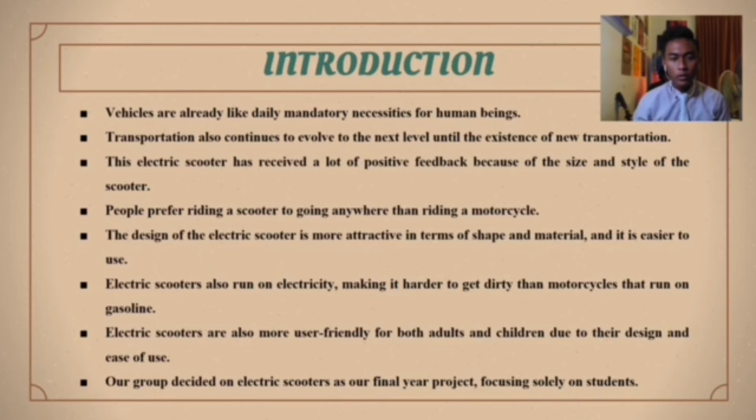Furthermore, people prefer riding a scooter to going anywhere rather than riding a motorcycle, because the design of the electric scooter is more attractive in terms of shape and material, and it is easier to use. Also, electric scooters run on electricity, making them harder to get dirty than motorcycles that run on gasoline. Electric scooters are also more user-friendly for both adults and children. Our group decided on the electric scooter as our final year project, focusing solely on students.

Next, we will look at the background of the project. The title of our final year project is Electric Scooter.

In 1740, Benjamin Franklin and Andrew Gordon developed the first electric motor, and invented the practical battery that could offer a consistent source of power for electric motors in 1799. In 1911, gas-fueled scooters were marketed, and many businesses began producing gas-powered scooters. In 1996, the first mass-produced electric scooter by Peugeot was heavy and not very eco-friendly due to its nickel-cadmium batteries. From 2009 until today, more efficient lithium-ion batteries create quick home rechargeable scooters, offering portability, ease of usage, minimal environmental footprint, inexpensive maintenance, and fewer laws.

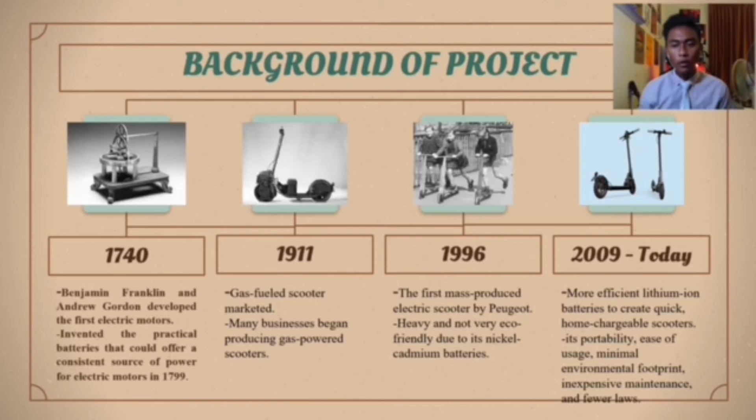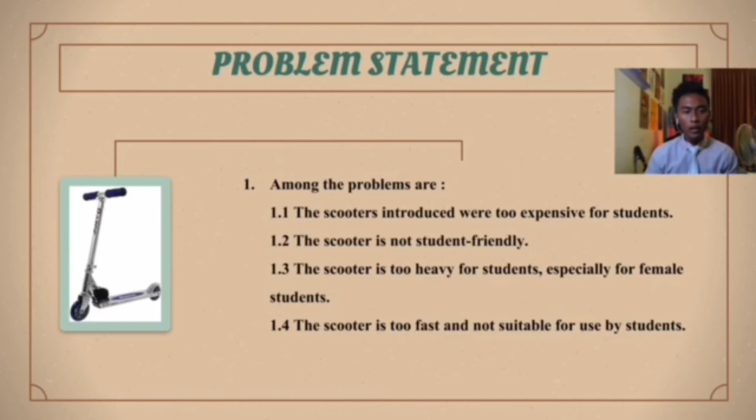Next, we will look at the problem statement. From our findings, there are many problems with electric scooters in the market: the scooters introduced were too expensive for students, the scooter is not student-friendly, the scooter is too heavy for students especially female students, and the scooter is too fast and not suitable for use by students.

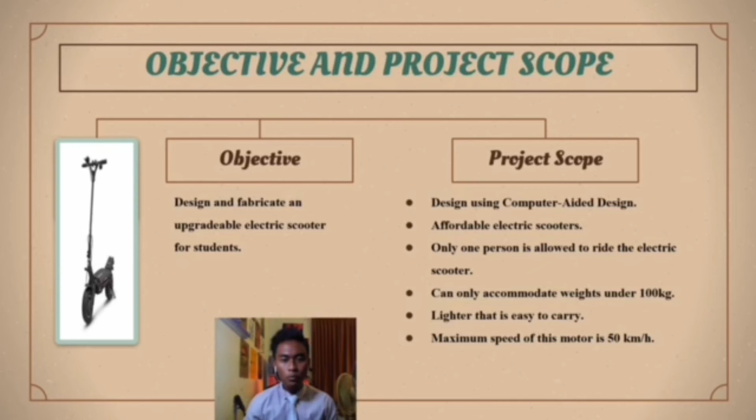For the objective: design and fabricate an upgradable electric scooter for students. For project scope: design using computer-aided design, affordable electric scooter, only one person allowed to ride it, recommended weight under 100 kg, lighter so it is easy to carry, and maximum speed of 50 km per hour.

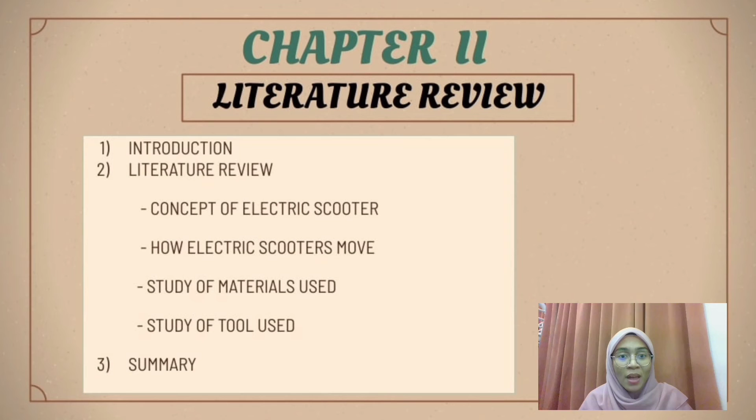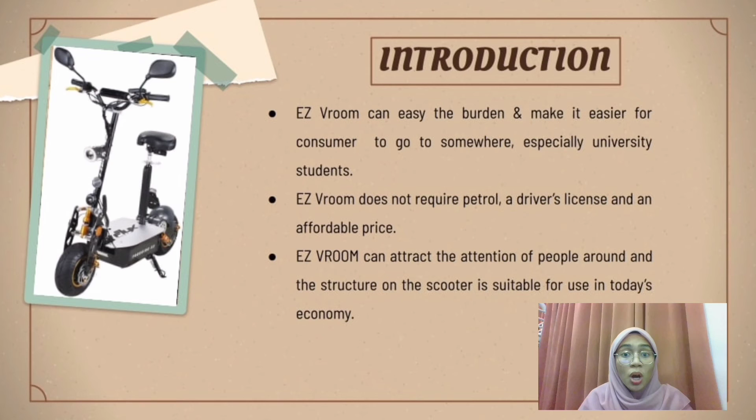Introduction: EZ Vroom can ease the burden and make it easier for consumers to go somewhere, especially university students. EZ Vroom also does not require petrol or a driver's license, and is an affordable price. EZ Vroom can attract attention, and the structure of the scooter is suitable for use in today's economy.

Next, the electric scooter concept. The concept of our project is a combination of mechanical and electrical concepts in producing a complete electric scooter structure that can move using electricity. There are many tools involving mechanics used in the production of this project, such as welding, milling, and so on.

The electric scooter 100% uses an electric motor, so this scooter does not need gasoline to move. With the existence of the electric scooter, it can reduce air pollution as well as noise. This scooter also uses a battery that can be recharged after use.

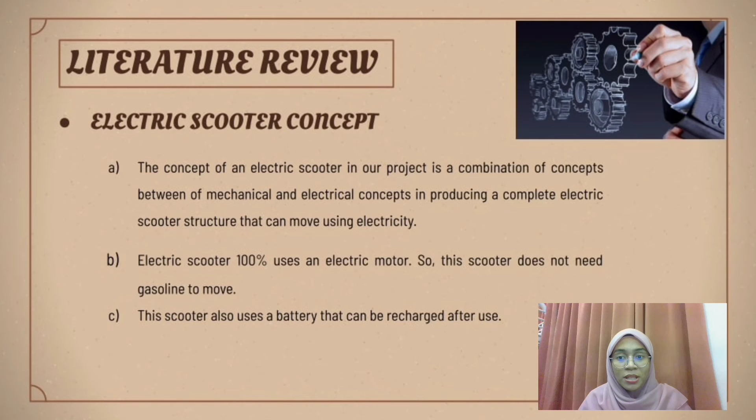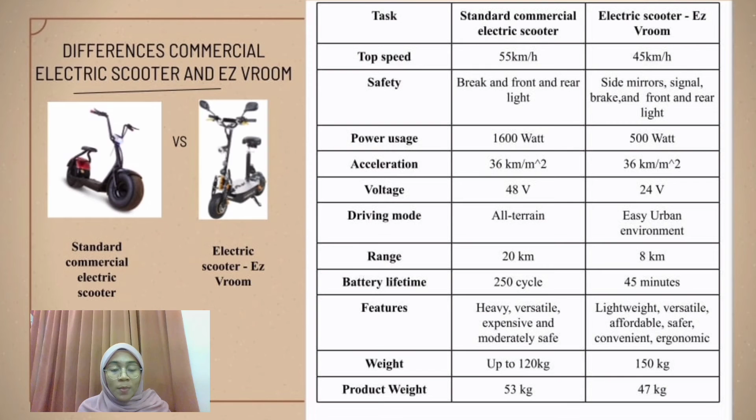Next, how the electric scooter moves. EZ Vroom's movement occurs through the motor, battery, and controller that controls the movement or direction of the scooter. The electric scooter has two wheels propelled by an electric motor attached to the back end. Its movement is easy; we just twist the handle on the right side, and we can control the speed by controlling the turning angle on the handle.

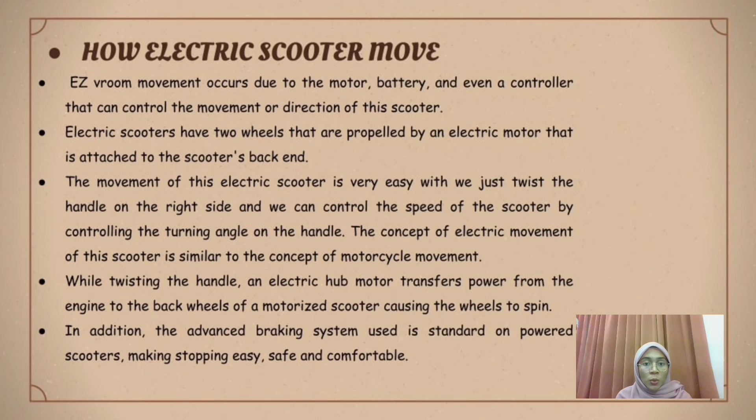The concept of electric movement of this scooter is similar to a motorcycle. By twisting the handle, an electric hub motor transfers power from the engine to the back wheel of the motorized scooter, causing the wheel to spin. In addition, the advanced braking system used is standard on the power scooter, making stopping easy, safe, and comfortable.

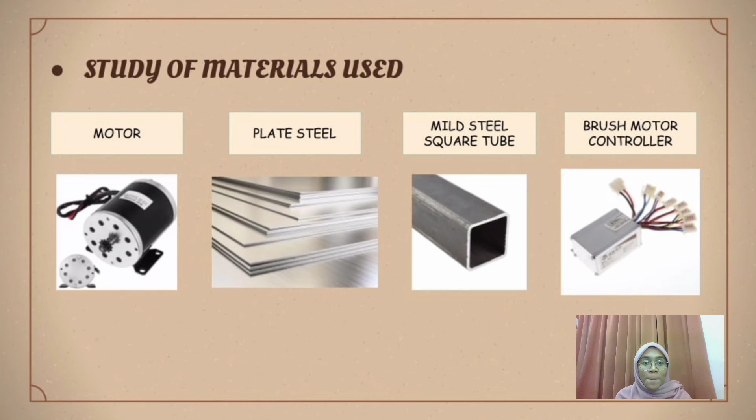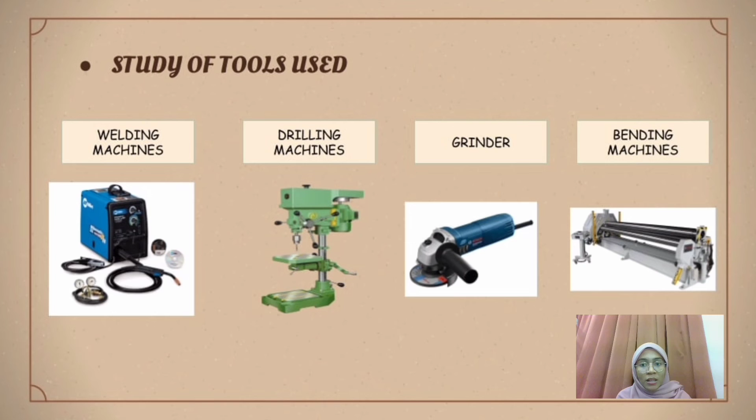Next, the tools used throughout the making of EZ Vroom are a welding machine, drilling machine, grinder, and bending machine. This EZ Vroom was created especially for university students to get around, especially on campus, quickly, safely, and to save time.

This method of producing the electric scooter starts by buying the materials needed. Next, we do fabrication by cutting materials such as mild steel tube and plate steel using the predetermined diameter. The cutting of steel uses a grinder because this equipment speeds up the cutting and saves time.

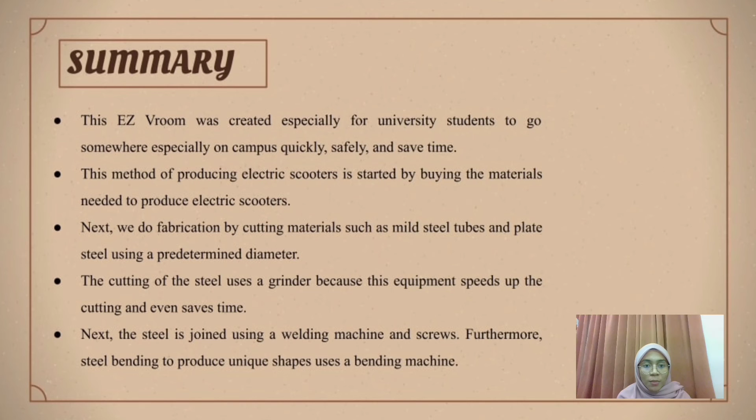Next, the steel is joined using the welding machine and screws. Furthermore, steel bending to produce unique shapes uses a bending machine.

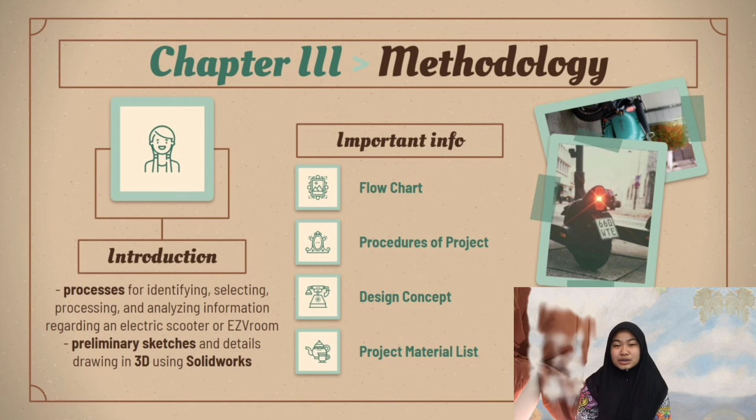The flowchart in this chapter begins with material collection, which includes the drawing sketch and material selection. After that, virtual design includes design sketch and design selection using SolidWorks software, and continues with the analysis of material dimension measurements as well as the battery and motor DC installation.

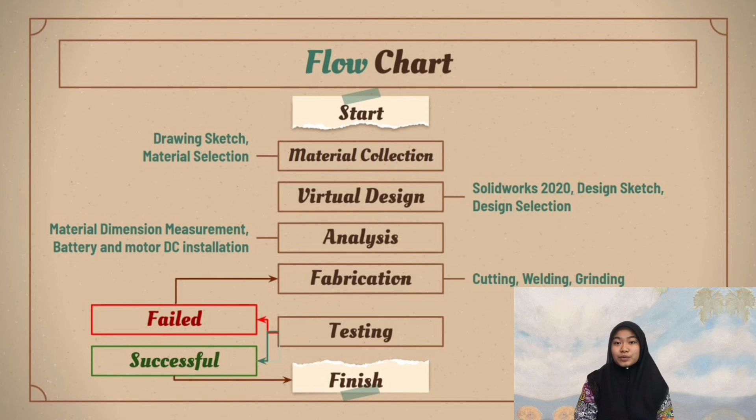After the process of fabrication, like cutting, welding, and grinding, we will test the product, and if the result fails, we will repeat the fabrication process until we achieve success.

This study includes early research of electric scooters that have existed in several places around the world, including Malaysia. Essentially, product research aids in the identification of unmet product demands, product feature development possibilities, and product awareness and preference. Hence, by understanding all of these factors, the product may be modified to meet current demands and prevent flaws identified in previous merchandise.

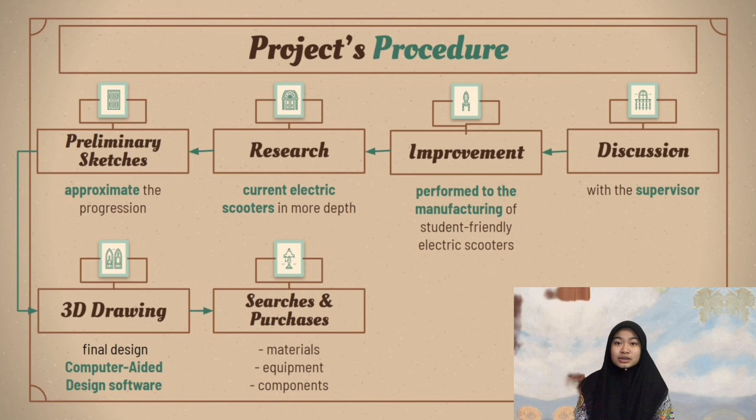Here are the processes that were implemented to make this project flawless. Problem definition, information gathering, concept generation, and evaluation of the generated concept are the 4 phases that make up the conceptual design.

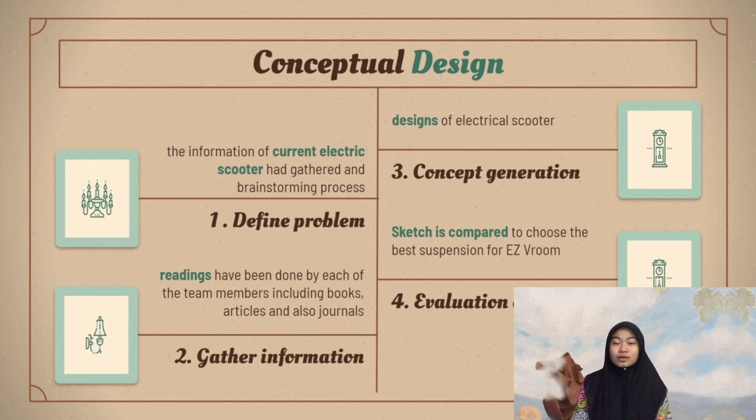Overall, various aspects are considered as final design selection factors for our EZ Vroom, including functionality, capability, security, cost, material suitability, size, and maintenance.

However, some characteristics of each design stay constant, such as functionality, in which each electric scooter in the sketch facilitates the movement of its users from one spot to another. Hence, other elements such as safety, stability, maintenance, and the construction process are compared for each initial sketch in order to choose the best final design.

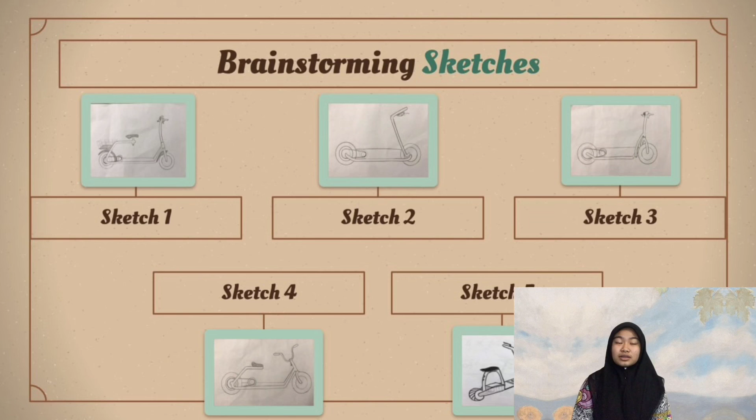So finally, concept design 5 was chosen as the final design for this EZ Vroom project despite several rounds of discussion among group members. The main reason for choosing this design concept was that it was easier to manufacture and had a design that looked stable to ride.

There is no doubt that the designs displayed in the early stage of the project are more appealing and stable, but the production method for those design concepts is sophisticated and doesn't fit with fresh talents like us. Other than that, the costs needed are reasonable and not excessive to spend.

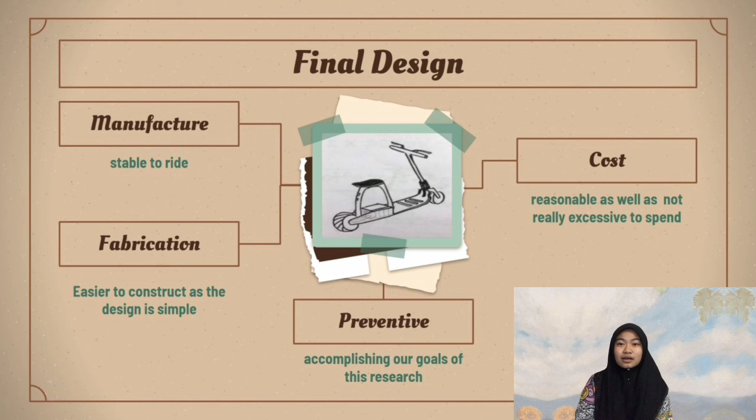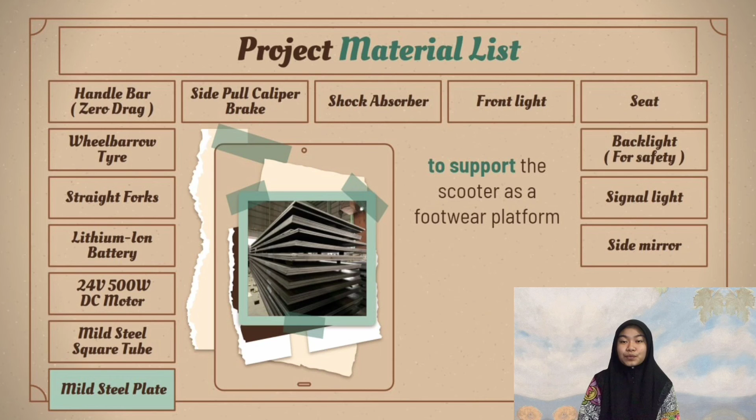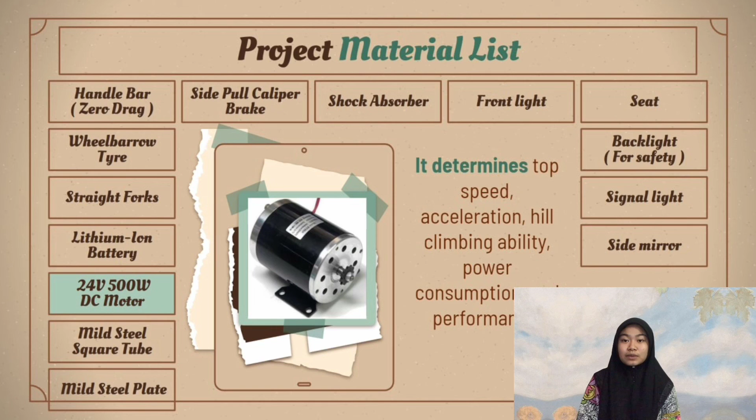Last but not least, information in this video is about the material list added to our EZ Vroom scooter. The project material list used includes a steel plate, which supports the scooter as the footwear platform, and a steel square tube as the main material of the scooter's frame and source of strength, and a DC motor, which determines top speed, acceleration, hill-climbing ability, power consumption, and performance.

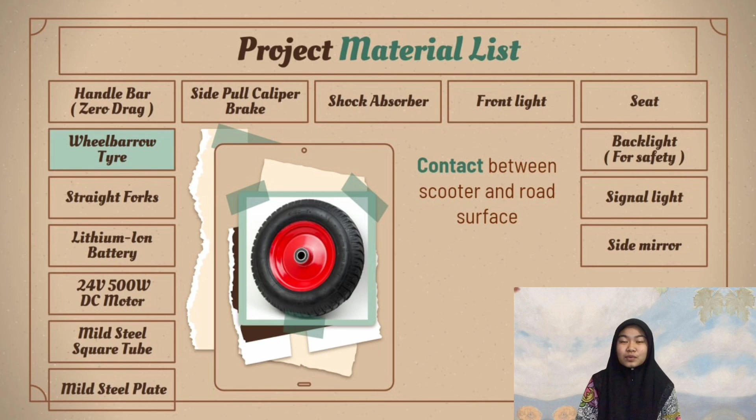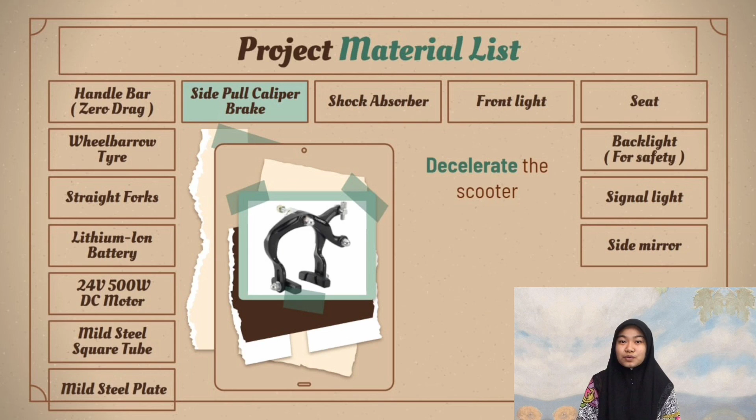Also a lithium-ion battery as the source of energy for the electric scooter, a wheelbarrow tire which is the contact between the scooter and road surface, a handlebar to steer the direction of the scooter, a side pull caliper brake to decelerate the scooter, and a shock absorber to absorb or dampen the compression and rebound of the springs and suspension.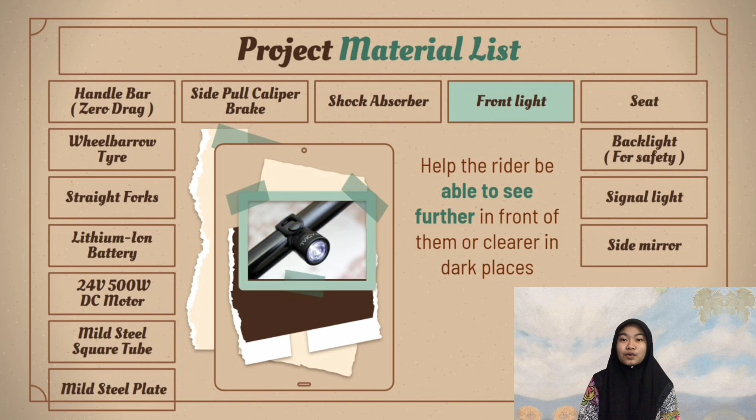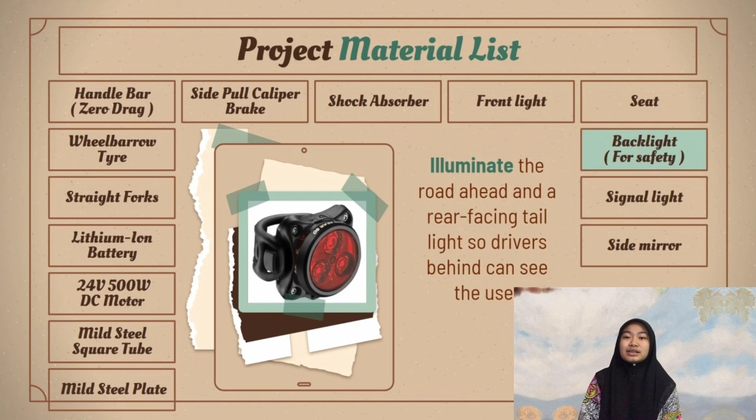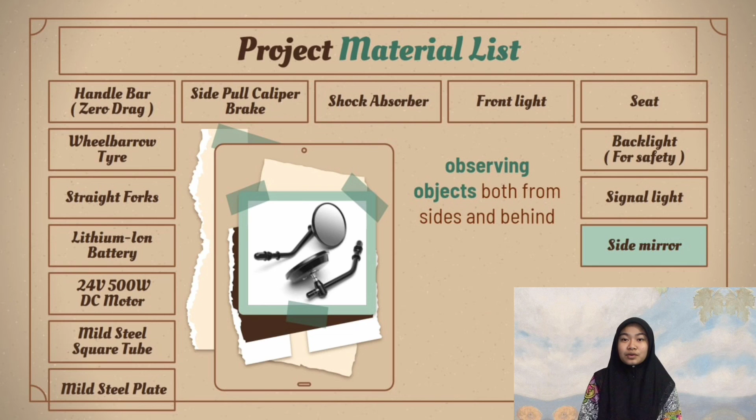A front light helps the rider see further ahead or more clearly in dark places, a seat supports the user's buttocks and back, a backlight illuminates the road ahead, and a rear-facing tail light lets drivers behind see the users. A signal light provides guidance at intersections where riders may have different needs from other users, and a side mirror is used to observe objects from both sides and behind.